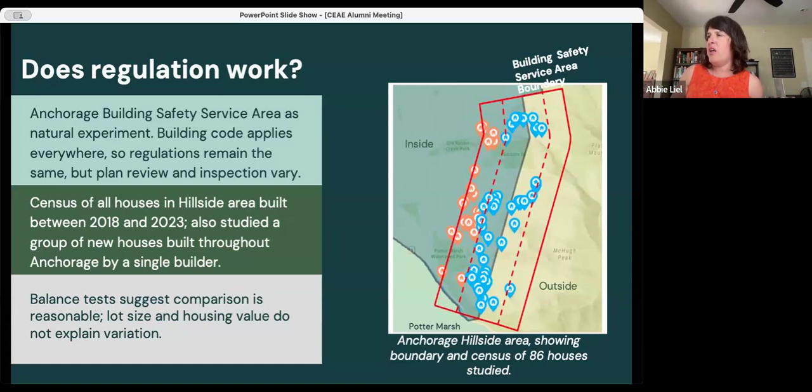So then we said, well, how are we going to know what the characteristics of these houses are? Because the building department isn't required to review many of these plans, there's no established data set of what the characteristics of these houses are. So what we did is we actually used drone imagery to take pictures of all of these homes. And those pictures are really high resolution. It's a whole series of pictures, maybe like 60 per house, that can then be stitched together to produce a 3D point cloud that we could then use to make very fine measurements of particular characteristics of the houses.

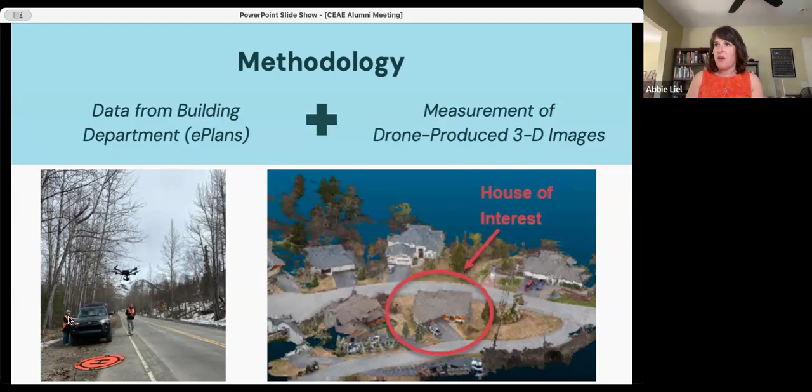If you're interested here, we benefited from the lack of regulation in Alaska. You can fly a drone wherever you want, pretty much, as long as you're not on a flight path. So we did not need permission to take the images, but we did not include any pictures of people or anything else. So we just measured dimensions. And here you see we partnered with the University of Washington, which has a natural hazards resource center. So they actually were the drone pilots and they flew the drones. This is the student, CEAE Boulder recent master's graduate, Brianna Clark, collecting the data.

Okay, so we looked at the results. We compared this inside and outside in two ways. We looked at procedural compliance and also engineering. So I'm going to start with the procedural compliance part first. And what we learned from comparing the procedural compliance is that, not surprisingly, where there's enforcement, there's a lot more compliance. So there's more structural plans, there are more change orders, which are documentation of changes that are made to the plans.

There's more review, and there's fewer differences between the plans that are available and what we observed inside versus outside. This is really important. You might be thinking right now, well, obviously, where you're not required to submit documentation, obviously there's less documentation. But it's really important for another reason, which is that in the places where there's no documentation, there's absolutely no record of what was built and whether it is resilient or not.

And so in terms of the housing market, buying and selling houses, in terms of recovery after a big storm or earthquake event, outside where there's no enforcement of building codes, there's basically very little data on what's there and the value of that in terms of housing resilience. So we see a big information deficit, not for me as an engineer, but an information deficit for this community in that they don't know what they have because of this lack of compliance.

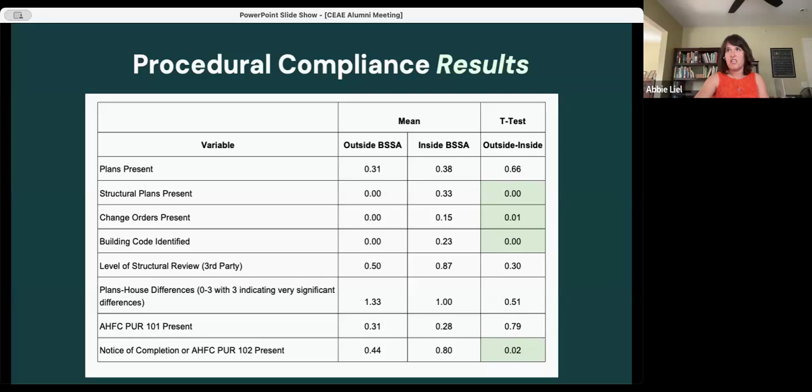In terms of the engineering, we did all these measurements of all these homes. I think it was like 80 measurements per house. And we decided what to measure based on engineering. So we measured things that we knew mattered for seismic and wind resistance. That includes the length of walls, the number of walls, the shape of the roof, the number of stories, etc.

And one thing we do note is that the houses were a little bit bigger inside the building safety service area as compared to outside. They tended to have more stories and a little bit more square footage. But the primary thing that we found, which is not necessarily what we were expecting to find, is that the houses inside were much more complex.

So on the top middle plot here, we have hip roofs and gable roofs. This is saying that inside the building safety service area, for about 50% of the houses the biggest roof is a hip roof, which basically has four sides, and outside only about 13% do. So this is an indicator of complexity. Hip roofs are harder to build.

They're also more resilient in the face of high windstorms because they have more support and a more redundant structural system. So we're seeing a pretty big difference here that's statistically significant. We also looked at roof complexity. We basically counted the number of roof lines that each house had. And we see this big difference in complexity, nearly double the number of roof lines inside versus outside.

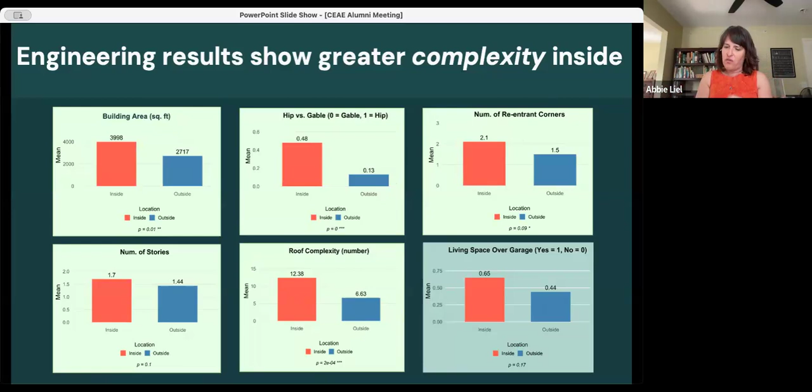I'll note here that I'm only showing results for that one community on the hillside, but interestingly, we found the same thing from that single builder. There is a builder in Anchorage that is building very different things on either side of this arbitrary line, in that they are also building more hip roofs, fewer gable roofs, and more complex roof lines when they're within the area where there is regulatory enforcement versus where they're not.

So our primary finding is complexity. It doesn't really tell you directly, is that good or bad? But what we think is that builders are probably partially compensating for a lack of engineering where there isn't plan review and inspection by building one-story and boxier structures.

And we know that they're missing some hazard resilient features, like hip roofs, and also introducing some problems related to soft stories and open fronts that they're doing without engineering, or without the guarantee of engineering when they're outside this arbitrary line. So then we spent a lot of time trying to figure out, well, what does this mean and why does it matter? And we have presented these data to a bunch of stakeholders in Alaska to try to get their feedback on this.

And there seems to be quite a bit of agreement that these are our primary mechanisms. So one is a kind of liability and risk aversion. And so here are the ideas that there's this added value from a building department, which is that they're in some ways protecting the builder from liability, either in a specific sense or just in a general sense, because the city is signing off on the engineering and the builders in a way that they are not where there is no building code enforcement. And so we see maybe some conservative design choices where there's more limited regulation because there isn't that additional level of review and sign off related to liability and risk aversion.

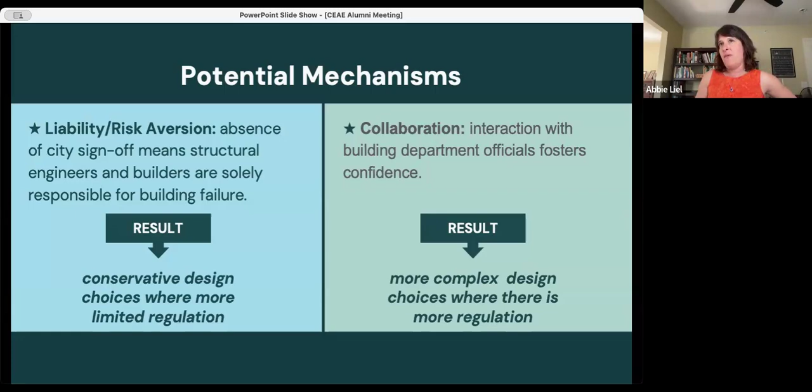The only possible thing that we've identified so far is that builders may have more of a profit when they're outside that building enforcement area. I'm not sure about that. We don't have the data to say whether that's true or not.

So the policy implications: unsafe housing isn't desirable, or not resilient housing. Nobody wants that. And it's also not really affordable housing. Everybody wants both of those things. And so we are borrowing from this idea of regulatory pragmatism to suggest that housing resilience needs the benefits to be made more apparent to consumers.

Our study, we didn't go seeking to identify the benefits of regulation. We thought we might find some engineering benefits, but we found a lot of other benefits too. And so we're trying to figure out how that can be utilized more effectively. There's clearly an opportunity to simplify and clarify the regulatory requirements and process. And we also need to think more broadly about the factors that are causally connected to high housing costs.

So on the topic of the simplification, we've also done a number of engineering analyses to try to think hard about what those simplifications would be. And to do so, we modeled 18 different houses, and we informed this based on what we were seeing was being built. You can see this is like the first floor plan. And we looked at 1- and 2-story houses, and we looked at varying levels of code compliance.

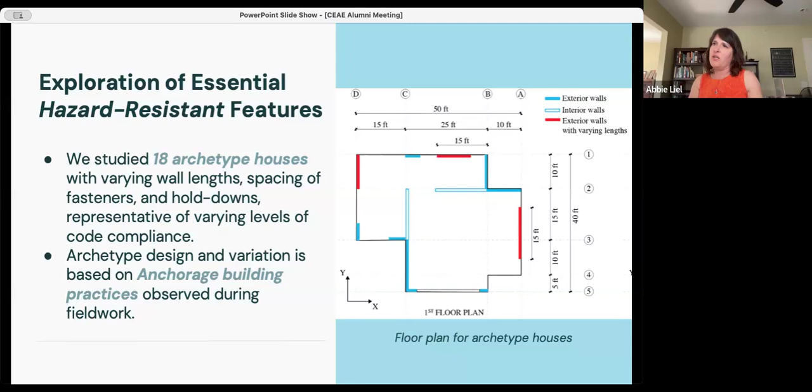So we basically looked at designs that were consistent with what we're seeing being built, where the building department has a role, and also what we're seeing being built outside that area. So we did a bunch of field work on building practices to define these houses. And then, and this is kind of more traditional engineering, we made simulation models of each house. We subjected them to recorded ground motions from earthquakes and did dynamic analysis.

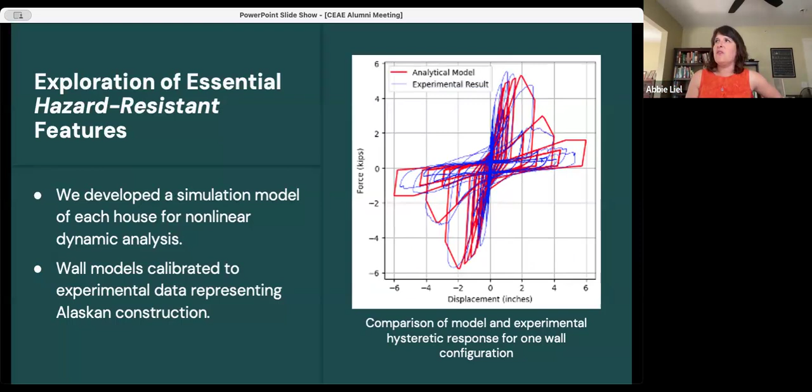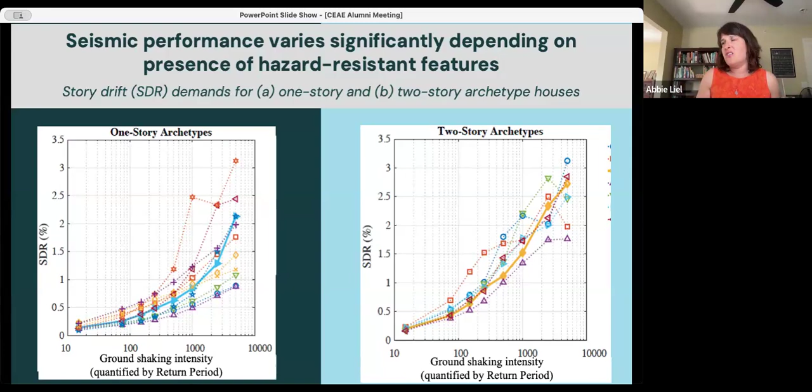And so the important thing here is that the 2-story results are higher in almost all cases than the 1-story results, and certainly when you have everything else being the same and you're just changing 1-story to 2-story. And that's pretty critical, because it means if you had, let's say, limited capacity for plan review and inspection, if you were a building department, you would for sure want to focus on the 2-story cases, because we in general see, based on the things that are built, greater impact from lack of compliance in the 2-story housing than in the 1-story housing.

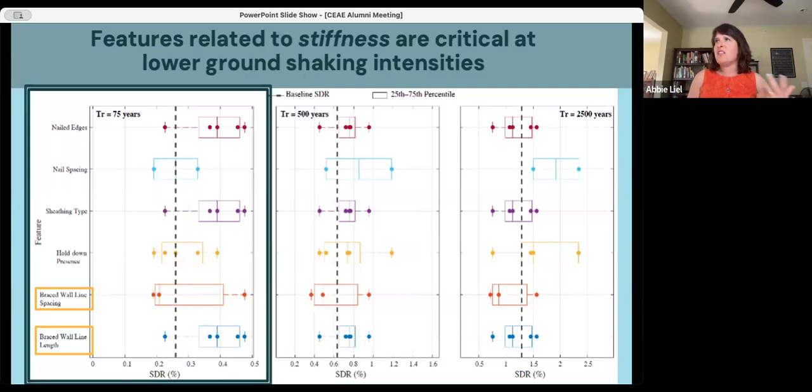Just as a side note, there are certainly houses in the Anchorage region that do not have enough walls, where there's no requirement that those be explicitly designed and inspected. So saying that, you need to make sure you have enough walls. And then if you're more worried about collapse at larger shaking intensities, then you get to some other variables that matter for strength and deformation capacity.

So things like hold downs, which are metal straps at the bottom of walls, and nail spacing, which is these are nails that are connecting the sheathing to your studs. Those are going to be critical.

So we were trying to use this analysis to show, like, hey, the building code is, I don't even know, 1,000 pages long, let's say, in a round number, and that's fine, but some of those things matter more than other things. And if you have a case where you have fairly limited capacity, either in terms of appetite for regulation or in terms of just human capacity to do the regulatory process, you would want to focus on the things that are most critical from the perspective of housing resilience.

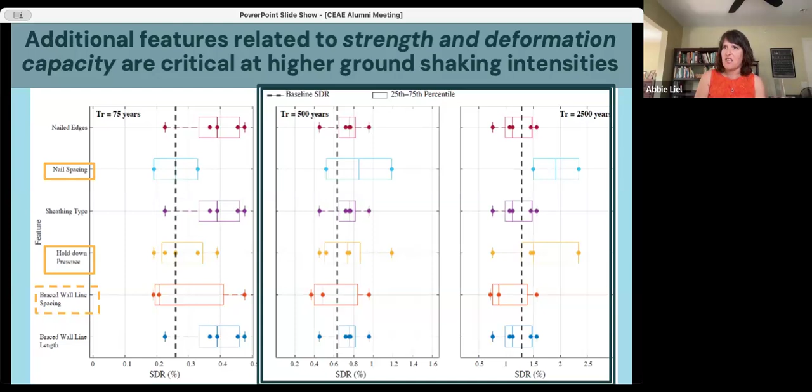And we know that regulatory capacity is a big challenge. We met with the state fire marshal in Alaska, who's responsible for building codes in most of the state, not in the city of Anchorage and a few other cities, but almost everywhere else. And one of our questions was, what do you need to do your job better? And he said, I need an airplane because I just cannot get people to the right places to do the inspection as many times as I need to do inspections. And so this is relating to commercial and residential properties across the state.

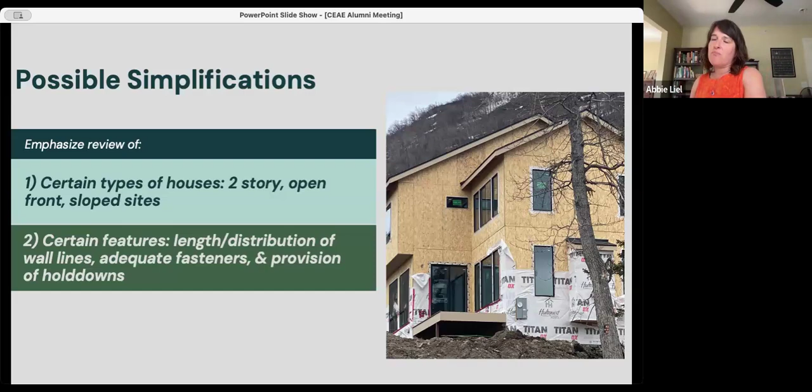So what we're trying to do in this engineering study is show that you can use engineering to say, okay, well, all these things are important in the building code, but maybe some of them are more important than others. And you could use that analysis to design a regulatory process that is getting at those critical issues more quickly. That's my last slide.

I will say that we are working, trying to support the city of Anchorage. They're currently thinking about providing optional plan review and inspection outside the building safety service area. And so we're trying to support them in developing a policy that would enable that. We've also had a number of meetings with the Alaska Seismic Hazards Safety Commission, and they're interested in understanding how our work supports or does not support some of the bills that are being considered in the Alaska state legislature.

I will say one thing that's amazing about working in Alaska is that people are really open and friendly and really willing to tell you what they know and to hear your feedback. I mean, we went to the building department on the very first day in Anchorage three years ago, made a friend, and that guy has now retired, but we have this whole community of people who are dying to know what we've learned. And we told them, look, we don't know what we're going to learn. It might show that your building department is doing amazing things, and it might show that you guys really have some work to do. And they were like, fine, we really just want to know what your study shows. So they've been really receptive to what the science and engineering is showing about what they could do differently.

So I'll just stop there. We are very grateful to the National Science Foundation for funding for this, and to a number of former CU students, Maria Jose Echeverria and Brianna Clark, and a number of Notre Dame students who contributed a lot to this work. Thank you.